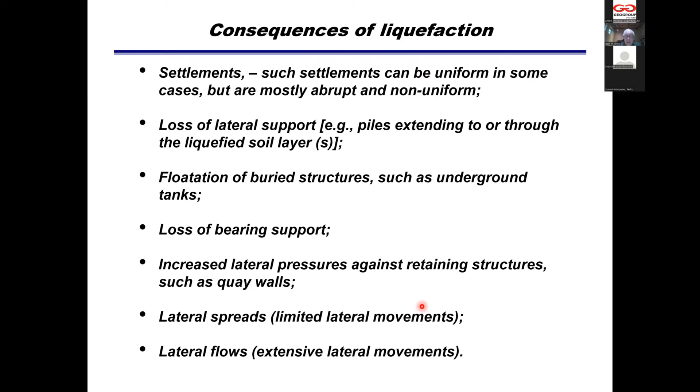So let's take a look just very quickly at some examples.

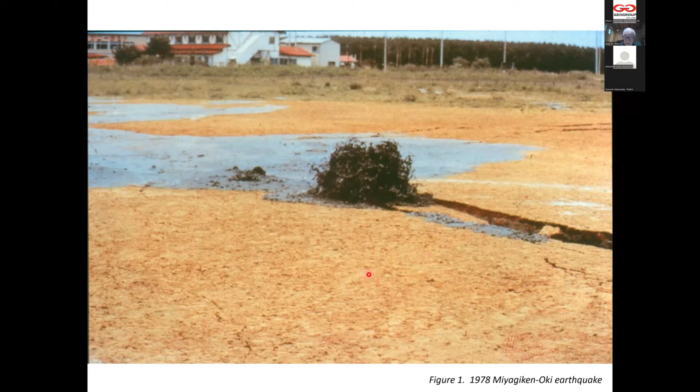You notice that accompanying that was some settlement of the ground as well, which sometimes can look like this. That's what I was talking about when I said the settlement most of the time is very sharp, not nice and uniform. It's very uniform in here, but very sharp at this end. So if you had a building sitting on top of that, it could have some serious difficulties here, or it could accommodate some of it, who knows?

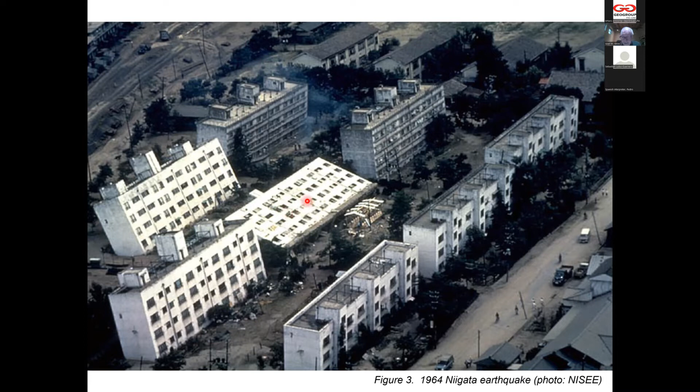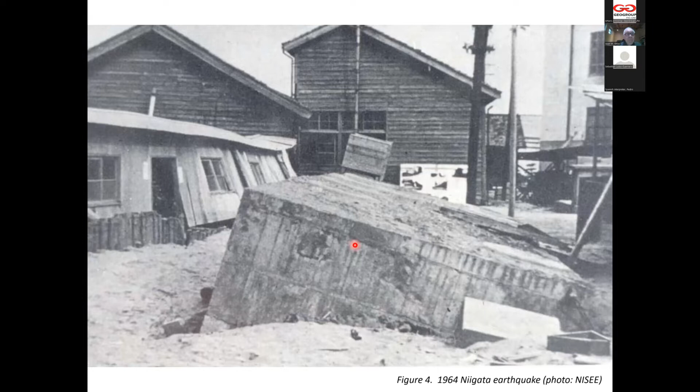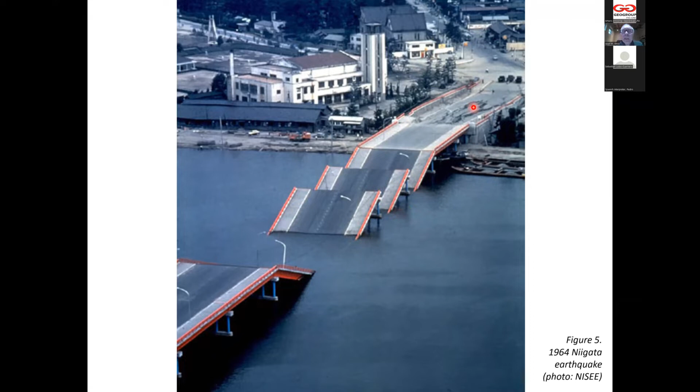Another example from Niigata, where there was some lateral spread, a small amount of movement of the embankments of the river, causing the separation of the bridge and the falling of the spans of the bridge, rendering the bridge useless. You can see there are some major difficulties here as well.

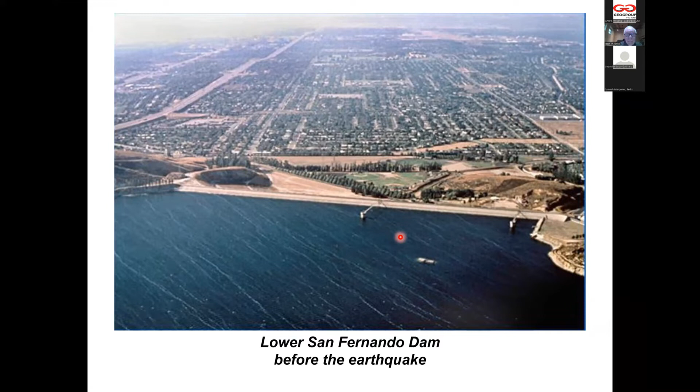Fortunately, the reservoir had been emptied about a year or more earlier to evaluate the ability of this dam to withstand earthquakes. It had been approved to refill about, I think, October or November of 1970. The water was on its way up, but it had not reached the allowable level, and that's why you have a little bit of freeboard still left even after the failure.

I mentioned something about the intake outlet towers. The one that was in the middle is gone. Remember that one right here? That's gone. But the other one near the right abutment is still in place, and that was very fortunate because they were able to immediately start emptying the reservoir and avoid having this part erode and cause spilling, basically eroding the entire dam and maybe really harming all these people.

In fact, they did tell people to evacuate. About 80,000 people evacuated their homes downstream of the dam.

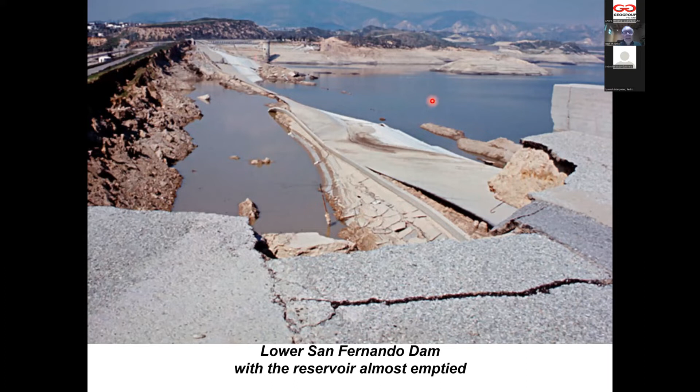This is what it finally, the upstream part looked like. This is that tower, and shortly after the reservoir was emptied, this tower fell over, I think, due to wind.

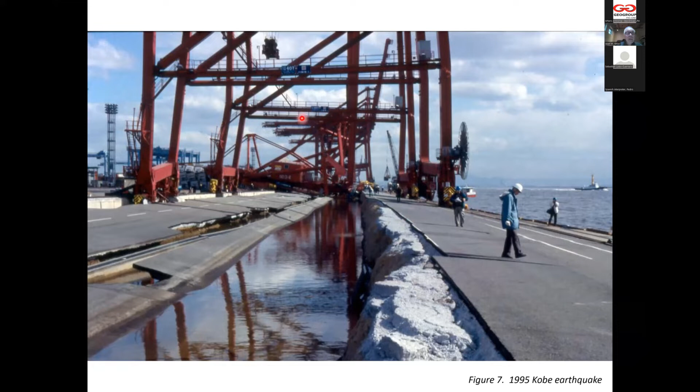And this is what happened in Kobe. This is a separation at the port part of the port island, causing these lateral deformations and causing a lot of damage to the many structures.

So how is liquefaction triggered? Of course, we see it happen in the field, but we don't know what is going on in the field, so we have to study it in the laboratory. It's been studied, among other places, using both drained and undrained testing apparatus.

In the drained conditions, this work was done in 1972 by Youd. He just ran a test. It was a dry sand, but it still shows what happens as you vibrate the material. He's looking at the void ratio as a function of how much displacement was taking place in the specimen, and it started at point A, densifying by decreasing the void ratio.

Shortly after that, it started expanding or dilating as the shaking went on, but then it became looser than it was originally. As shaking continued, it began to decrease in volume and then went up a little bit, but just on and on, it ended up with a significant amount of reducing the volume. So the net effect, if you have drained conditions and apply a cyclic loading to a soil, it will eventually compress or decrease in volume.

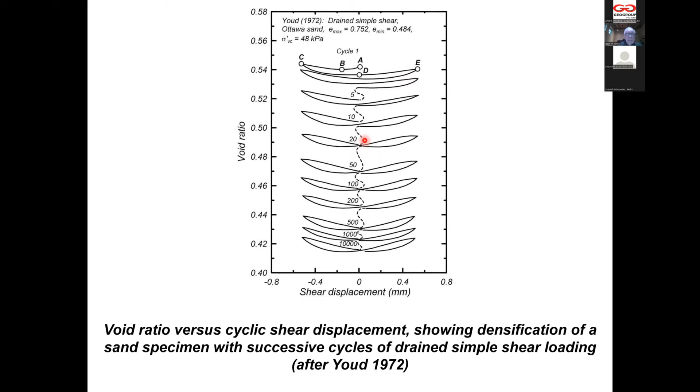So when you apply undrained conditions in a laboratory, which correspond more to what happens in the field, because most liquefiable soils are permeable, but not that permeable, and the shaking takes place over only a few seconds, therefore there's no ability to actually consolidate or decrease in volume the way the material wants to do.

So going back to the laboratory for a cyclic undrained test, starting at point A, as the cycling was going on, the soil actually wanted to go along this line to compress down this amount due to the shaking, but it couldn't do that because it's undrained. Therefore, it has to stay at the same void ratio, and the skeleton had to give up some of this effective stress that was being applied to it.

And transfer that to the water, which became the excess pore water pressure. The effective stress was decreasing from this value down to this value. And of course, if this can continue on, it could actually decrease to practically zero, with the pore pressure becoming equal to the initial effective stress.

And then, basically when you run the full test and examine everything that's happening, here's one where this is an undrained cyclic triaxial loading test done on Sacramento River sand, where you apply a uniform cyclic shear stress, and you measure the pore pressure being generated as shaking goes on.

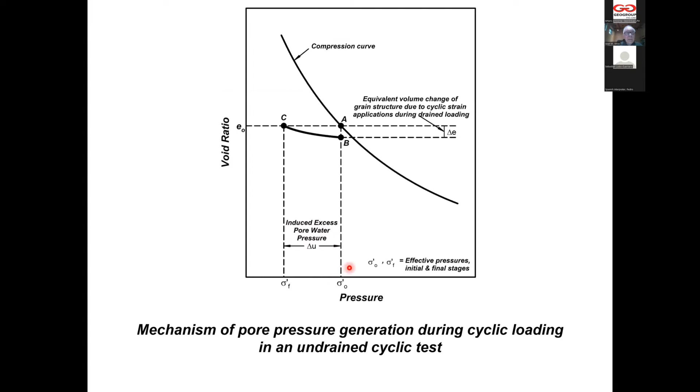This value RU is really an expression of the ratio of the excess pore water pressure divided by the initial effective stress. So RU of 0 means there is no excess pore pressure, and RU of 1 means the excess pressure has equaled the confining stress. So in the test, as that's being monitored and expressed in this value, it reaches 1, but it oscillates up and down around 1 as the shaking goes on.

But while that's happening, straining is also taking place in the sample, and it initially begins very small, but then starts growing and reaches some value, in this particular case, about 2.5%.

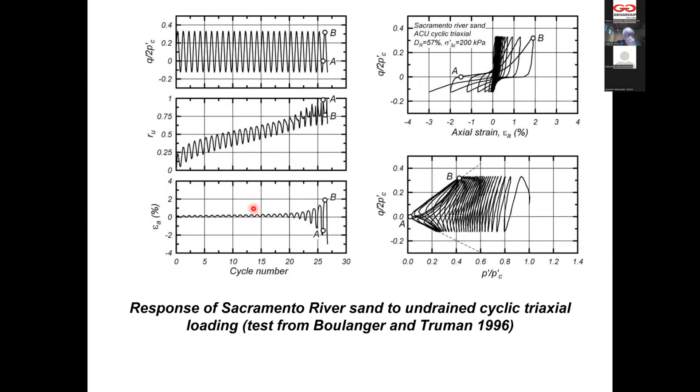So then what do we do? How do we define a state of liquefaction? In the field, we only see that there is something happening, like the settlement, the cracking, the lateral movement, what have you. But in the laboratory, we have these things that we can measure, the pore pressure and the displacement. Therefore, the criteria for deciding what goes to triggering, in the laboratory, can be reaching a pore pressure U equal to the initial effective stress.

And then expressed in terms of RU, it's the ratio of U over sigma prime. And when it reaches 1, that's 100% pore pressure ratio. But in most cases, as we saw in that lab test, it really touches 1, but then comes down below that as shaking goes on. So it's a little bit less than 1.

Or because sometimes we can't really measure pore pressure that well, or pore pressure is not as uniform as it could be in the sample, it's much easier to define things by something we can measure a little more precisely, which is strain. So we use the double amplitude strain, and in triaxial test, we use something like 2.5%, and in the direct simple shear test, we use about 3%.

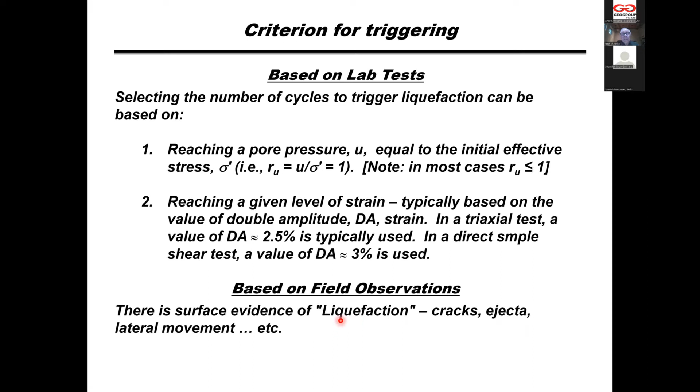Of course, in the field, we can only look at the evidence of liquefaction: the cracks, the ejecta, soil spurting out of the ground, lateral movement, and so on and so forth. That's where we are with respect to that.

So now, how do we evaluate that? Since it is of concern to us, we've seen some difficulties with it. How do we evaluate that? The approaches available to us really are three: we can use what we call the stress approach, the strain approach, or the energy approach. These have all been developed, proposed, and attempted to be used.

And what we've discovered is the simplest one to use is the stress approach. The strain approach is probably the most fundamental one, but it's a little hard to use. And the energy approach is a very appealing one, and several people have attempted to do it, and I'm sure there will be more. But its application is not that easy to do.

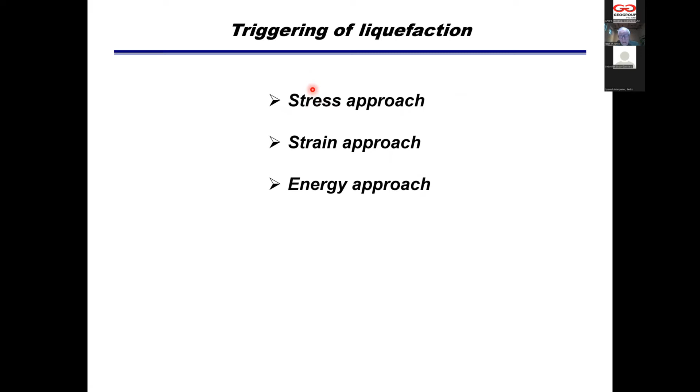So in essence, we've basically all stuck to the stress approach. And the stress approach is very simple. It consists of comparing the capacity to demand. Capacity is the stress required to trigger liquefaction, and we typically take whatever that stress is and divide it by the initial effective stress. We call that the cyclic resistance ratio, or CRR.

And we can get that from the laboratory, or we can do it by back calculating case histories, which I will mention again, but I will not describe how we do that because there's just not enough time today.

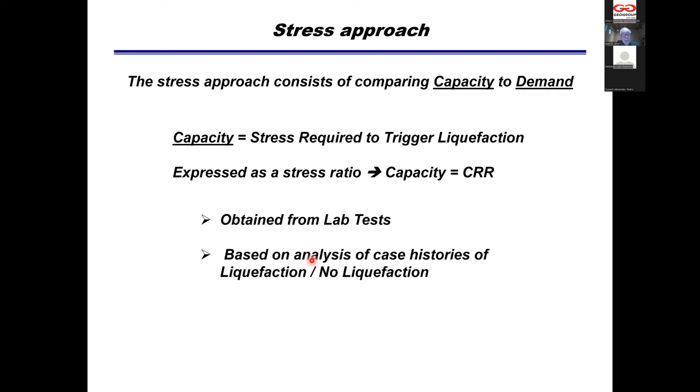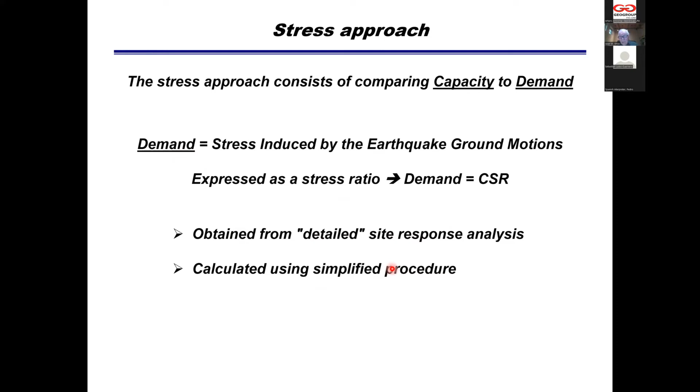And then the other side of the equation, which is the demand, is the stress induced by the earthquake ground motions. Again, we normalize that with the effective stress at that particular depth we're looking at, and we call that the cyclic stress ratio, which is the demand. We can get that from a site response analysis, or using a simplified procedure, which I will not describe, I will just mention again.

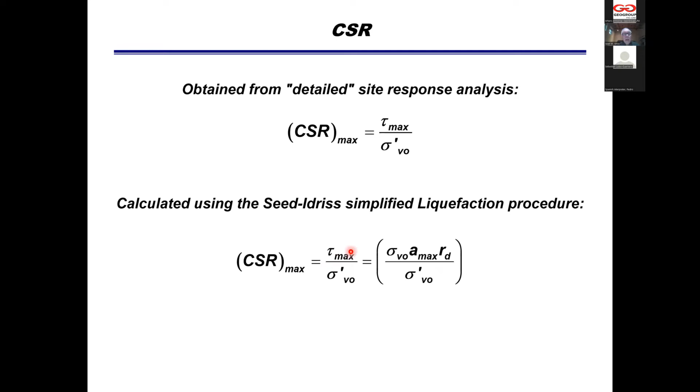So the CSR is the stress induced by the ground shaking. From the site response analysis, we get a tau max, and therefore we have a maximum cyclic stress ratio, which we normalize with respect to the effective stress at that particular depth. Or we're using the Seed-Idriss simplified liquefaction procedure, which we developed back in 1969, 1970, and was published in ASCE in 1971, using this very simple equation, which I will describe shortly, and these are the definitions of these various symbols.

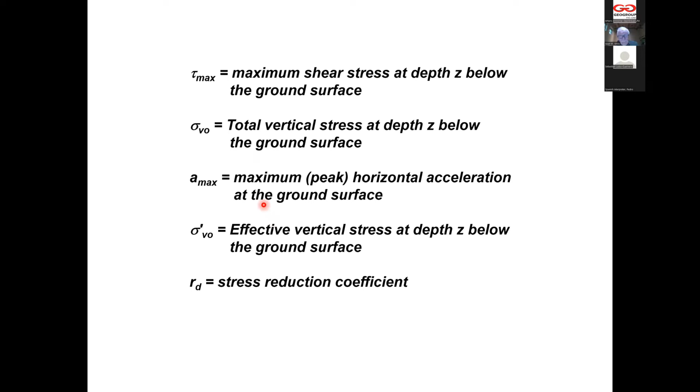Thank you very much. Now, the basis of the simplified equation that I just mentioned is actually Newton's second law, F equals ma. So tau max is equal to M, the weight of the soil, or the total stress at that particular depth, and A is the surface acceleration.

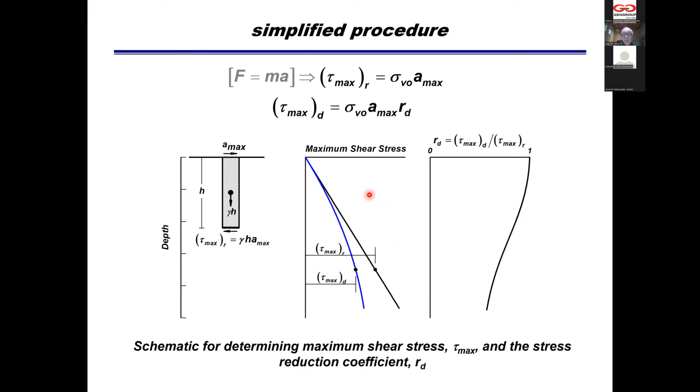And this is how this R sub D varies with depth. Now, the other thing we also need to worry about is can we get rid of that thing at the top?

Can you see the entire slide? There's no... it's covered by whatever Zoom covers it with. I can see your full screen. You can see the top effective duration or something? Yes, sir, the title is effects of duration, yes. Okay, so it's just on my computer that is doing this to me. That's okay, I don't need to see that one. I'll be sure the listeners can see it.

But anyway, the duration is also an important issue, and we need to take care of that, because earthquakes, first of all, we are making sometimes comparisons between what we calculate using earthquake ground motions that are non-uniform.

I'll show you an example of that shortly. And lab data, which is usually done using very uniform shear stress like this. So we need to find a way to go from one to the other.

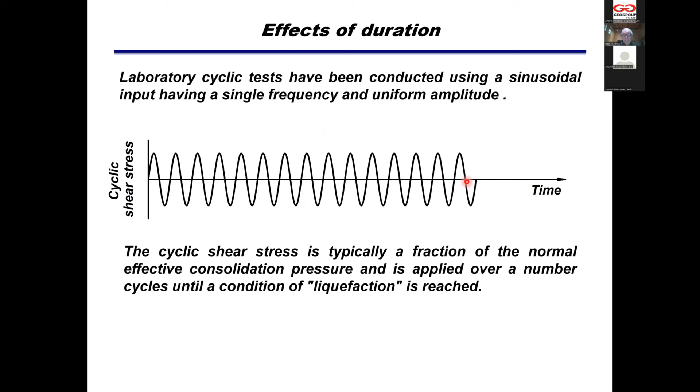If we look at the lab test and we run a test like the one I showed you before, we get that this reaches 100% pore pressure ratio, or a certain strain level, at something like 20, 26 or 27 cycles. And the applied stress was about 0.32, something like that. So we can plot a point on a cyclic stress ratio versus number of cycles graph.

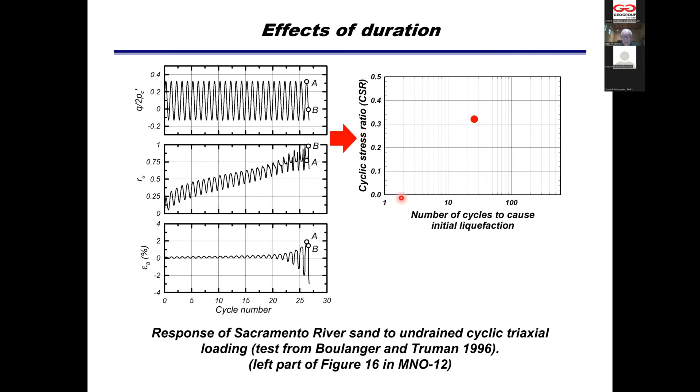A point like this one. We can run several other tests and eventually get a plot that looks something like this. So now we know how things go as a function of duration when the imposed load is a nice uniform load. But then how do we translate that to the effect of earthquakes?

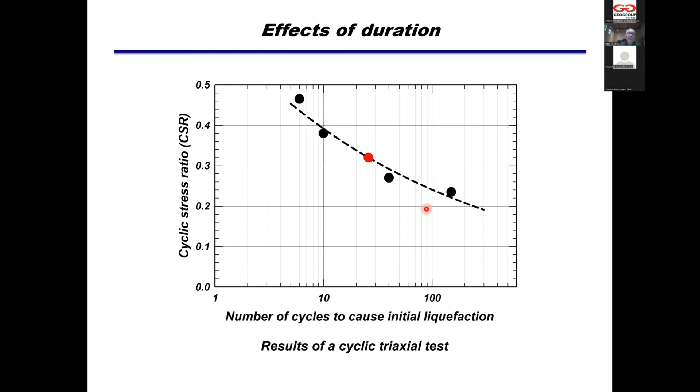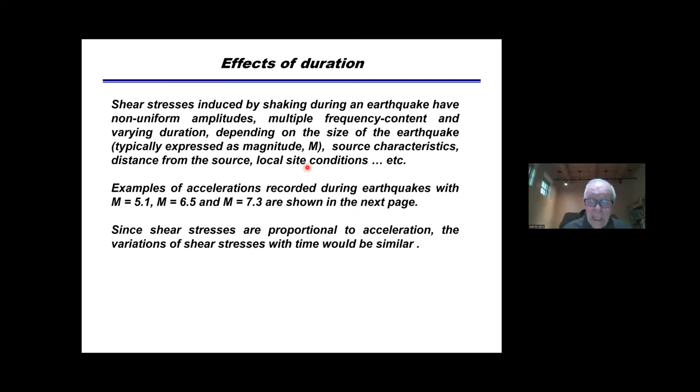There are ways to do that. I will not have time to really go through that tonight, but there are ways to do that. And as a result, we can take a time history, which is what an earthquake would cause.

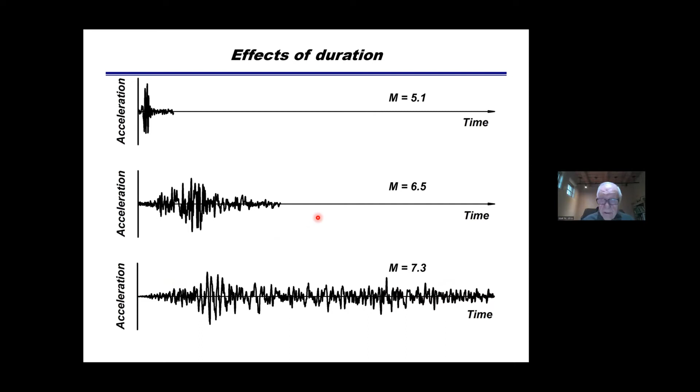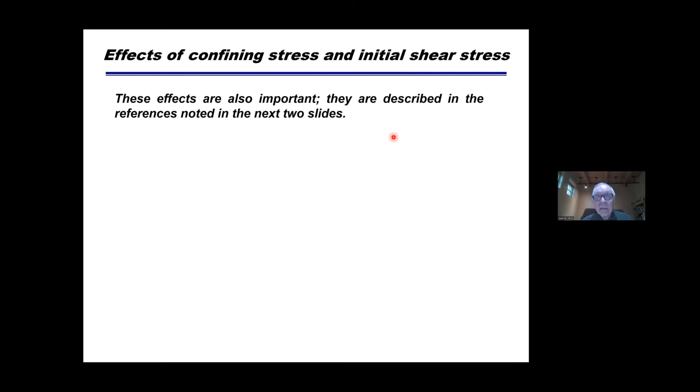So you have to find a way to change to some equivalent nice uniform amplitude. And there are other things that affect how we approach this, as I said, confining stress, initial shear stress. But I won't have time today to really go through all of that.

If you want to dig into the details, I'll show you at least two references you can go to. One is the monograph that Professor Boulanger and I wrote 14 years ago now, but the details haven't changed. You can go to the Earthquake Engineering Research Institute. I think you can get an electronic copy of this monograph for either $15 or something like that. It's not a very expensive one.

Then there's another report, which updates some of the stuff in the monograph for the CPT and SPT, again by Professor Boulanger and myself. This was published as part of the Department of Civil Engineering at the University of California at Davis. So if you can get to that website, go to the publications and you can access this and download it for free. It's a very easy thing to get.

So now, based on all of that, as I said earlier... hello? Somebody? Oh, working on that. Somebody's in my iPhone speaking to me.

Anyway, as I said before, we can use case histories to develop the procedure to evaluate the triggering of liquefaction. To do that, we need a parameter to correlate among the various cases. We can base that on laboratory tests or on some field measurements, in situ measurements like SPT or CPT, or shear wave velocities, and so on and so forth.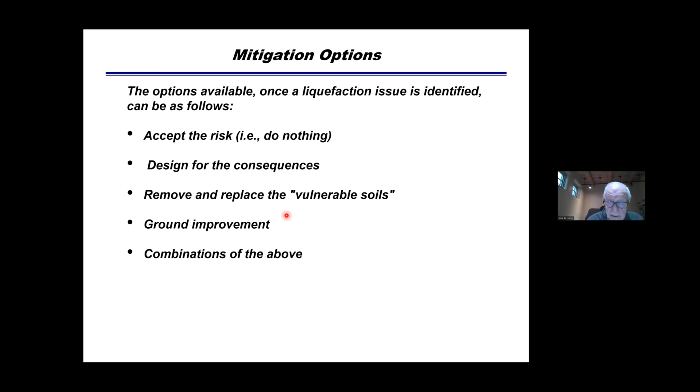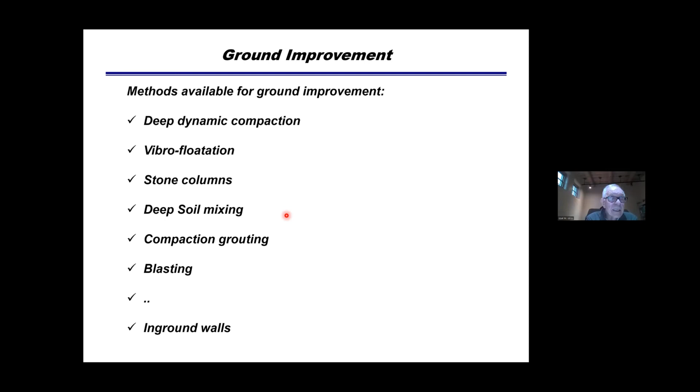And these are some procedures that are available: deep dynamic compaction - and for deep dynamic compaction, please keep in mind, no matter what the contractor tells you, that it's not good beyond about 10 meters. It's just totally ineffective - they say we'll triple the weight, still does not improve things beyond about 10 meter depth. So keep that in mind if you ever use it. There's also vibroflotation, stone columns - stone columns have some problems, but we're not going to talk about the advantages and disadvantages, just list them right now - deep soil mixing, compaction grouting, blasting, in-ground walls, and so on and so forth.

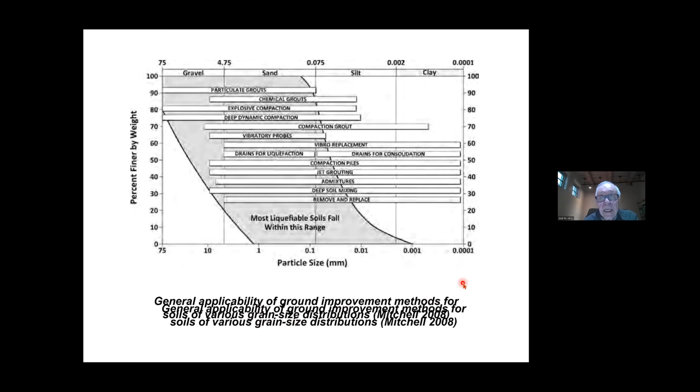Quite a few procedures. Professor Mitchell, who is our guru on ground improvement, has been for maybe the last 40 plus years, put together this chart. Unfortunately the title of the figure got double jammed, so to speak - let me see if I can correct that. There we go, and we can go back, and now this can be read.

This shows what procedure is most applicable to what size, depending on the soils that are to be improved, ranging from gravels all the way to clay. Of course for liquefaction we're really interested in this range shown by these two lines. Clay can lose strength during shaking, but it's not a liquefaction issue the way it occurs in sand, as we've discussed on many occasions before. And silts, as long as they're cohesionless, can liquefy in a way similar to sand.

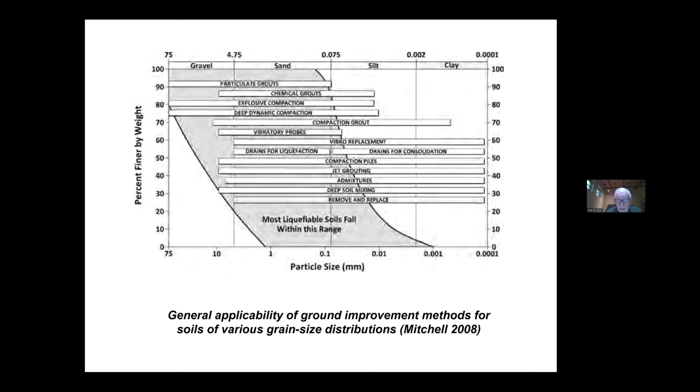So these are the various ways - for example, deep dynamic compaction is good for gravels all the way down to silts, maybe. Explosive compaction, again, good for these soils. Some are not that great for gravels, like vibratory probes - you just can't compact gravels that way, and vibro replacement cannot do that either. Anyway, this is a very useful chart to look at when you're deciding on what to do. This chart was also published in our monograph, so you can see it there and it's described in a little more detail.

So I thought I will end my presentation this afternoon by showing you an example where a combination of those ground improvement procedures were used. It's an existing dam in Canada, called the Seymour Dam. It's not a very large dam - it consists of an embankment part and a concrete part. The embankment was sitting on liquefiable soil, and there's no way to save that dam by improving the foundation below the dam - it'd just be too expensive.

So what was looked at was - here's the existing dam shown in yellow, and these foundation layers here, I'll describe them shortly, are about 30 meters of vulnerable soils. But the idea was to come in and keep the dam exactly where it is, improve the foundation down to 30 meters, and build a downstream new dam sitting on the new, improved foundation. Let me change back to the laser pointer here.

So that when the earthquake occurs—not if, when the earthquake occurs, Vancouver is in a very high seismic area—the upstream part of the dam will fail, but what's retained after that will be a well-behaved dam. It won't look pretty, but it will not allow the water to overwhelm the city.

The concrete part was much easier to improve in place. There were a lot of tendons and various other things. Structural engineers worked with us on that, and it was done very nicely.

Looking at that 30 meters of foundation, it looks something like this. They're mostly cohesionless soils, vulnerable to liquefaction. There are a lot of large boulders in this part, so it could not really be improved in situ. They decided the upper 10 meters would be removed, the huge boulders taken out and set aside, maybe in a windrow or whatever solution came up, and then put back in again, properly compacted.

The next 10 meters, now we're getting into water and can't really excavate very cost-effectively, so you'd use dynamic compaction. The deepest part—since dynamic compaction can only go about 10 meters and we just cannot reach that depth—required blasting. So the sequence was: take out the first 10 meters, do the blasting, come back and do the dynamic compaction, replace all the soils, and build the embankment.

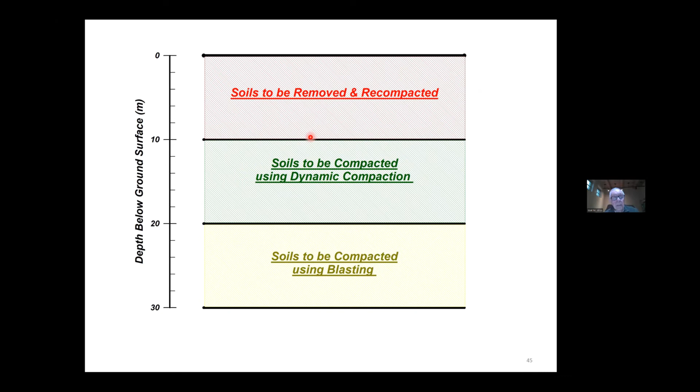That's how things were done. So this is what it was going to end up looking like, and this is what it ended up looking like. The project actually started in the early 2000s and was finished about 2009 or 2010. It took several years to finish, but it was finished.

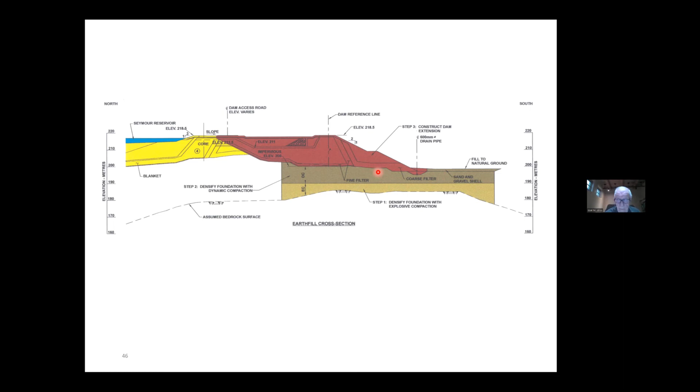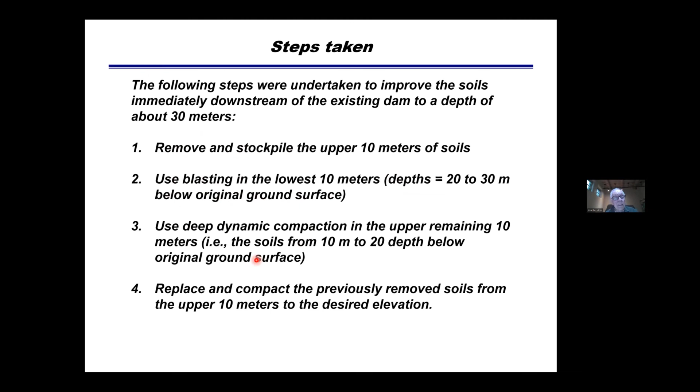So that's again describing what happened with the sequence of things: remove and stockpile, use blasting, dynamic compaction, and then put back the soil to get back to where you want to be.

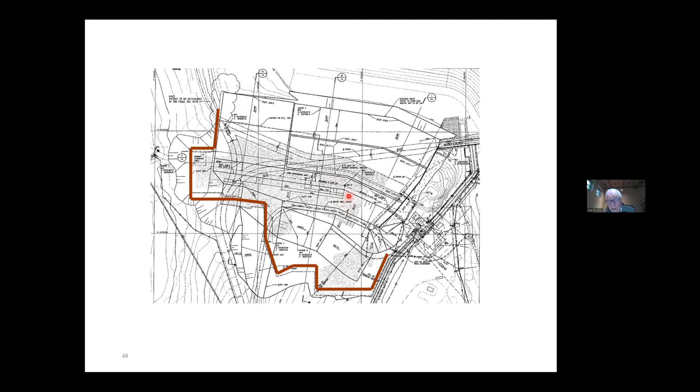This is the area of the embankment over here on the upstream side, the water side. This is the part where they first took out the top 10 meters, then blasted the lower 10 meters, the lowest 10 meters, and so on. This was designated in panels, from panel 1 to panel 15 over here.

It turned out that the loosest area was here, which we'll see a little later. There were three passes. We put charges at various depths and various spacing, and all kinds of configurations.

We had some fantastic experts in blasting working on this, and Professor Jim Mitchell, the one who showed you that chart, was an advisor on this project. I personally was a member of the technical review board—in fact, I was the chairman of the technical review board. We had two other geotechnical engineers and one structural engineer for the structural part.

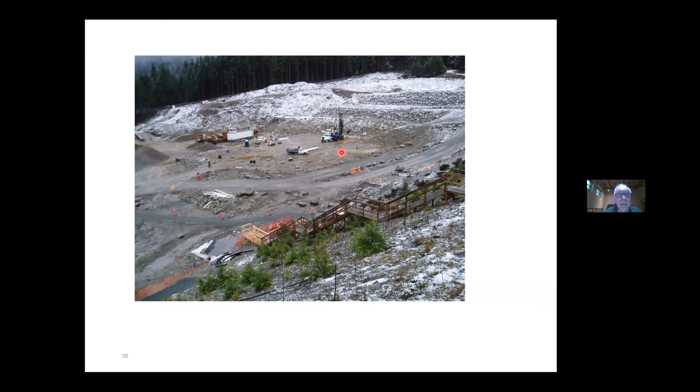This is just things in progress—the drill rig drilling down and placing the material to be blasted. And here's a close-up of that machine doing that.

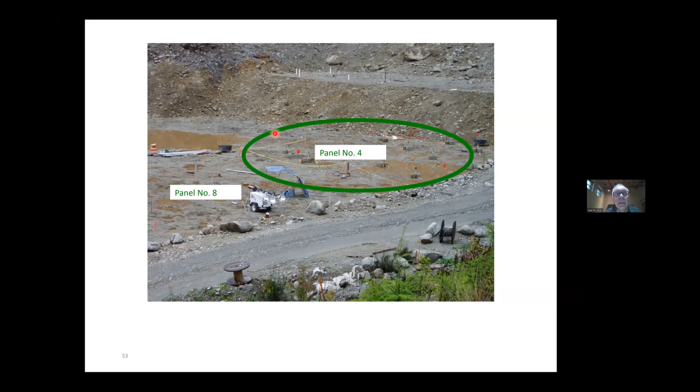Now let's look at panel 4, when they actually blasted it. Here's the blasting in panel 4, and this is what we observed when the blasting took place. You'll see there's a fountain—it's like the one in Geneva, if any of you have been there, with the water spurting out into the lake.

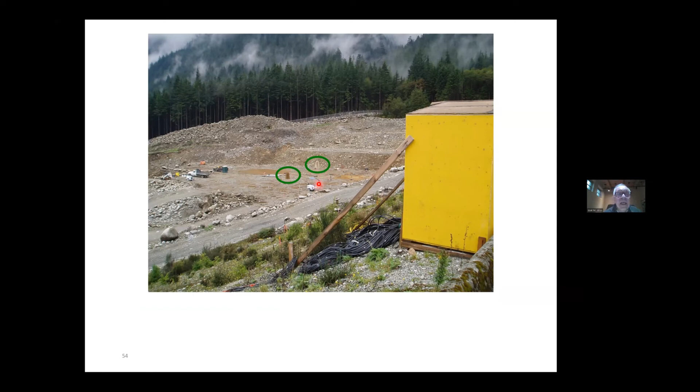A close-up of those two—this one is almost a little dirty water, this one is very dirty water, depending apparently on what it's going through. It's rising up several meters, maybe 2 or 3 meters, so it's pretty high. This reminds us of what we saw during the earthquake: liquefaction taking place, and as a result, high pore pressure dissipation resulted in settlement. That's how we measured the effectiveness of the blasting.

This is one where it really went up—about 5 meters, maybe 3 meters, maybe 4 meters. I forget the exact number.

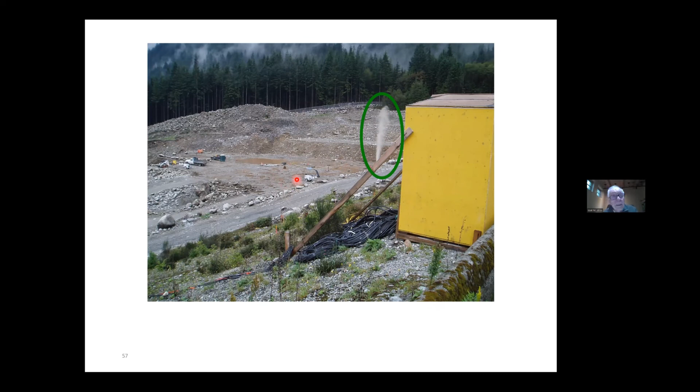We're all standing on the crest of the existing dam, and I took all these pictures myself. It was fun, a very nice day actually. This shows how muddy and watery it got because of all that water spurting out, so it was very effective.

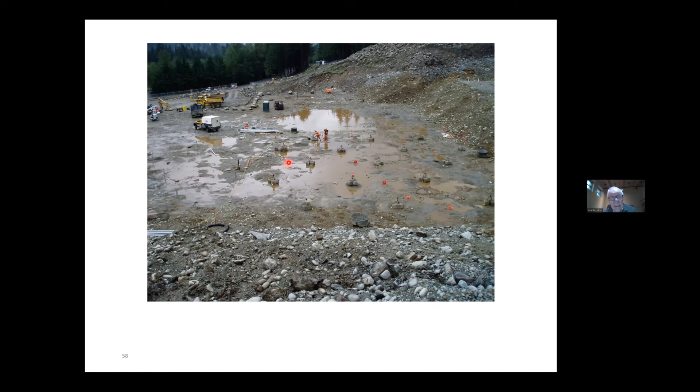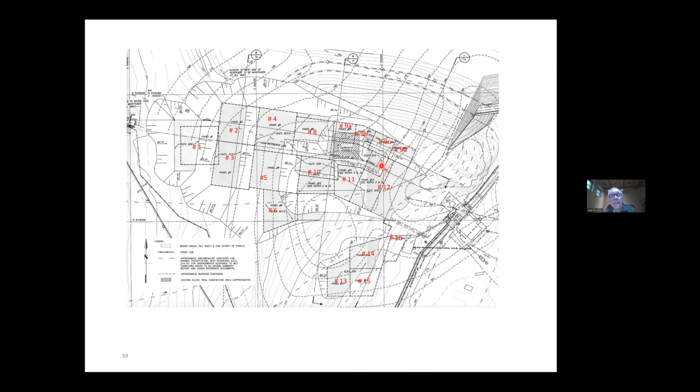When you look at this area and the measurements, pass 1 resulted in settlements up to about 400 millimeters. That zone appeared to be the loosest, panels 9A, B, and C, and 10, I believe, centered around panel 9C.

Then the second pass brought an increase, more settlement, but not as much as the first. In this area, they went up to almost 1 meter. The third pass brought still more settlement, some a little larger than before, some a little smaller, going up to about 1.5 meters.

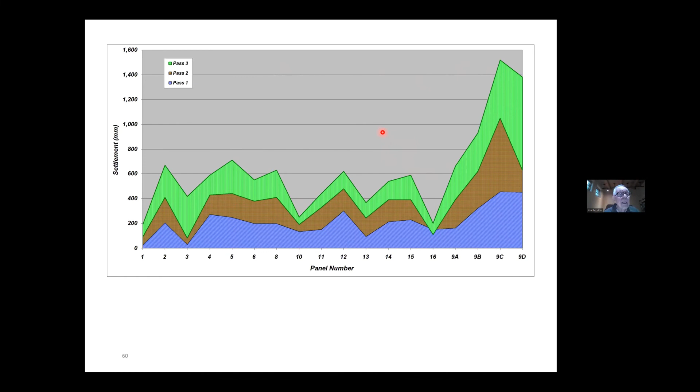Based on that, we judged that the area had settled enough that it was really compacted, making it non-vulnerable to liquefaction in case an earthquake happens.

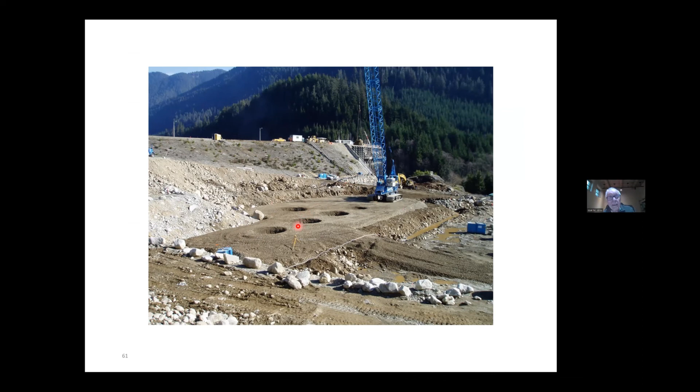Following that, the dynamic compaction: here's the crane carrying the weight, and the weight having dropped created these craters in the usual way this is done. Another part, this is the concrete part, the existing old embankment. They built a concrete wing wall to create an abutment, since there's no abutment on this side. There was an abutment on the right side, but not on the left.

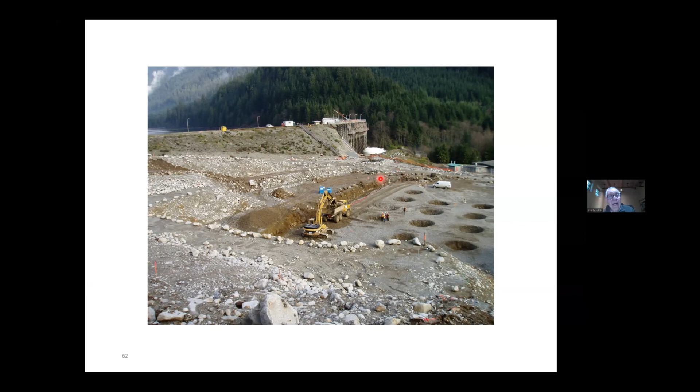That's really the end of my presentation tonight. It's almost 6:05, perfect, so we've got plenty of time for questions.

Just a final thought, rather than giving any conclusion, since that would just be a summary of everything I said, so there's no point in doing that at this juncture.

I think there's been a lot happening in this century, especially in improving analytical and experimental capabilities. The number of improved constitutive models for nonlinear analyses, and the improvement in platforms to run these analyses, whether FLAC, Plaxis, or OpenSees, covering finite elements and finite differences, have seen tremendous improvements.

There have been tremendous improvements in experimental capabilities too, whether it's the huge centrifuge at University of California at Davis, the large shaking table at San Diego, the large shaking table in Reno, I think they have one now, and a huge shaking table in Japan. All of that is being used and providing wonderful data.